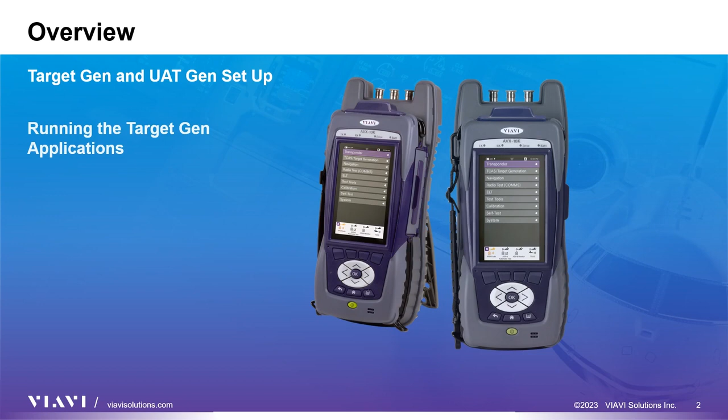In this video, we will be discussing the settings and procedures for both target gen, which is generating targets at 1090 MHz, and UAT gen, which is generating targets at 978 MHz. We will look at saving custom scenarios, saving test generator parameters, and viewing the results.

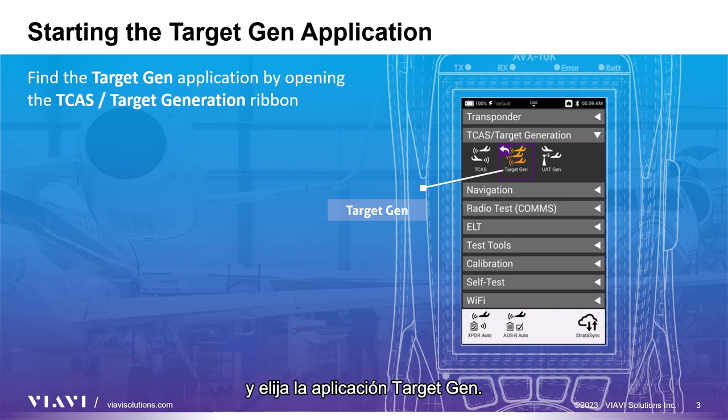Let's look first at the target gen application. After turning on your test set, open the TCAS target generation ribbon and select the target gen application. Icons can be moved around within each ribbon. You can learn more about that and other interface information in our user interface video.

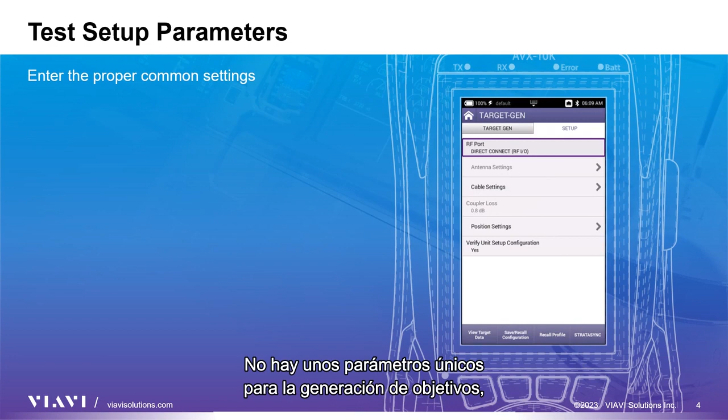There are no unique test setup parameters for target generation, however, there are several modifiable parameters on the main page of the application. As a reminder, the common test setup parameters, like test method, gain and loss settings and position settings, have all been covered in our video titled Common Test Settings and General Preferences.

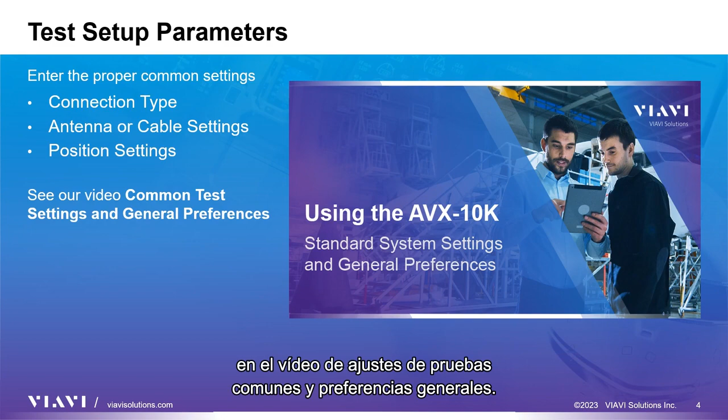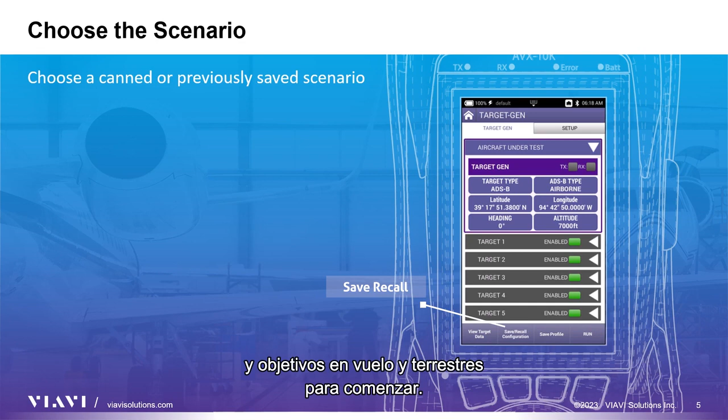The first step is to generate a scenario, and like the TCAS application, some canned scenarios, airborne target and surface target, are provided to get you started. 7 custom scenarios can also be saved. Press the Save Recall Configuration button to view the provided scenarios.

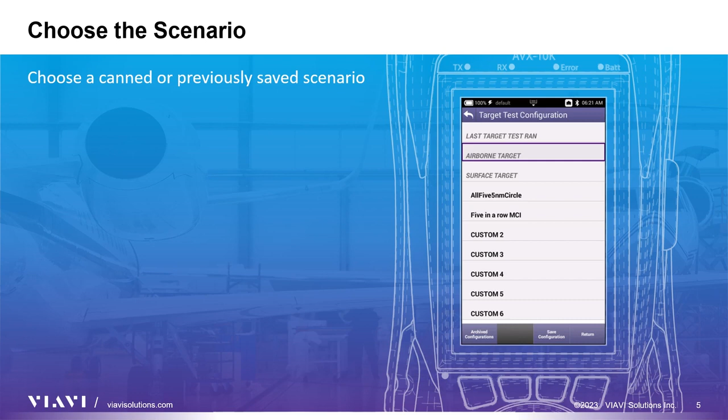The suggested approach is to start with the airborne target configuration, make modifications to fit your needs, and then save the configuration. Before running a test scenario, the aircraft under test needs to be set to an airborne condition and altitude needs to be simulated using an air data test set.

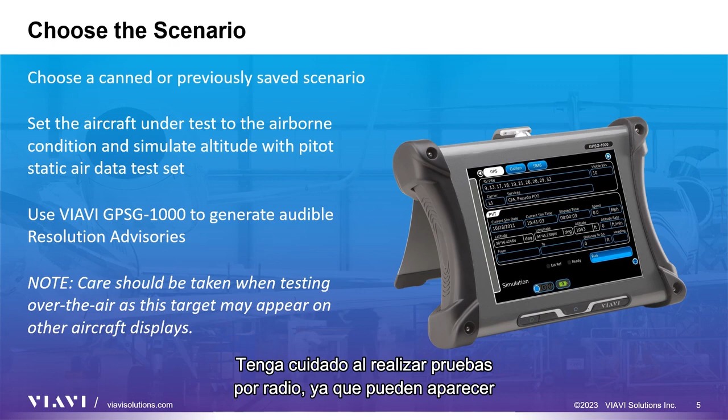In order to generate audible resolution advisories, you will need to leverage the VIAVI GPSG-1000, or similar, and simulate a flight path through the generated targets. Note, care should be taken when testing over the air, as targets may appear on other aircraft displays.

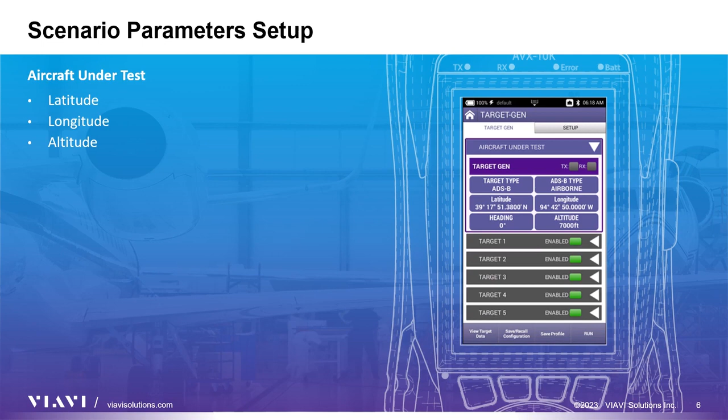Once a scenario has been loaded, any of the values displayed with a blue background can be changed as desired. Enter the latitude, longitude, and altitude of the aircraft under test. This is the reference point that the 5 targets will be using.

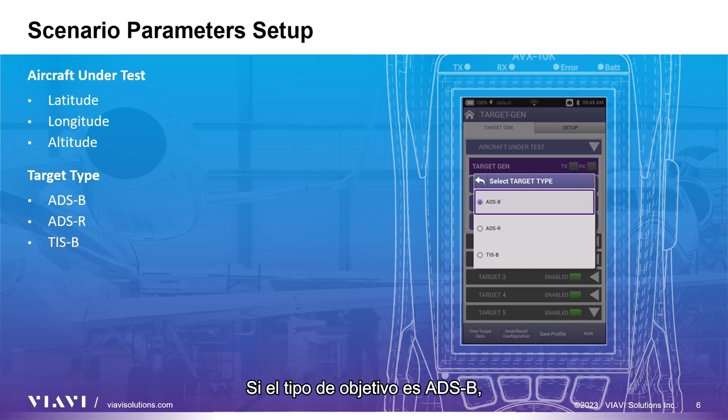Target type can be set to ADS-B, ADS-R and TIS-B. If target type is ADS-B, the ADS-B type can be toggled between airborne and surface.

Now you can set each of the target's bearing, range, and altitude values to place and point targets towards the flight path of aircraft under test. All values are referenced from the aircraft under test location and height.

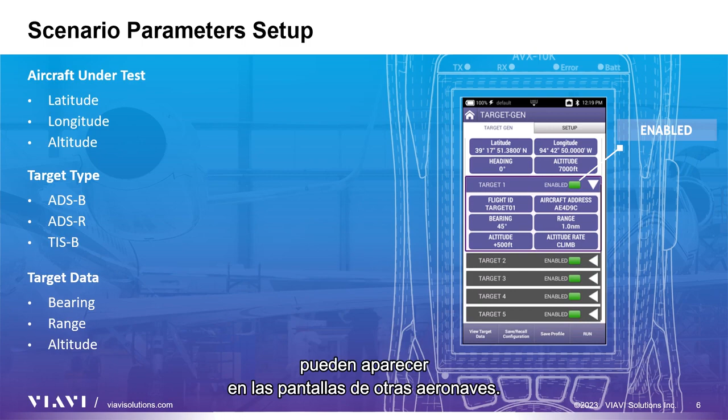Targets can be enabled and disabled by clicking on the green or red indicator. Again, please note, care should be taken when testing over the air, as these targets may appear on other aircraft displays. If you have modified a canned scenario and wish to save it, click on the Save Configuration button.

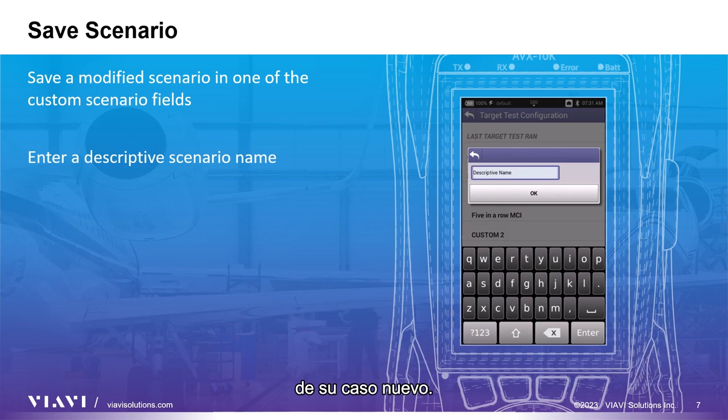Scroll down to one of the custom fields and click on one to enter the name for your new scenario. Once that is entered, click the Save Configuration soft key. The saved scenario will be retained, and you can load it anytime in the future.

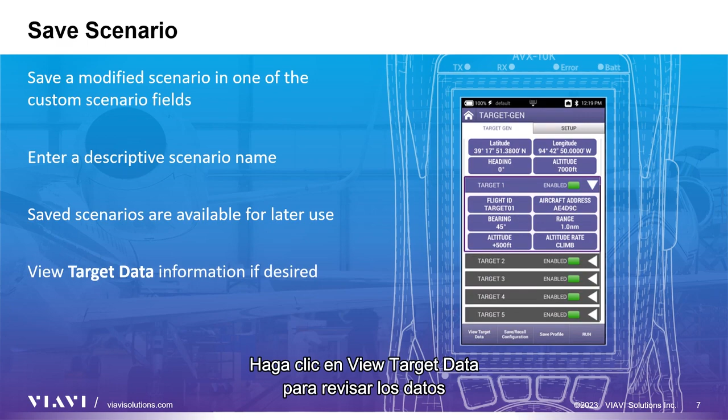Click the View Target Data button to review your target configuration information. Once everything is set up, press the Run key to start the scenario. If the aircraft is configured properly, all targets should be displayed on the aircraft under test.

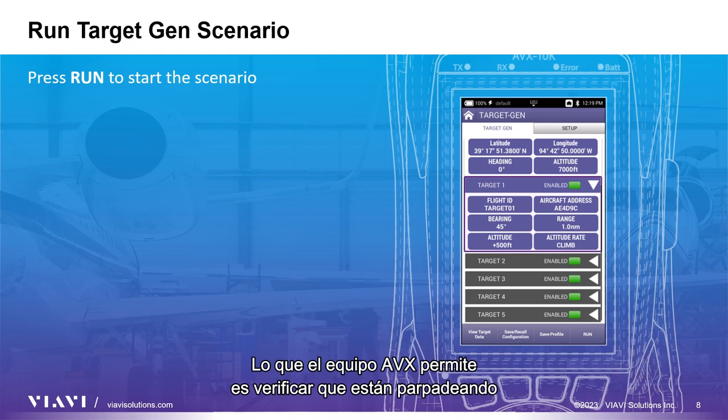There is not much to see on the AVX itself, other than to verify that the transmit and received lights are flashing. Once satisfied that the aircraft unit under test is operational, press Stop to complete the test.

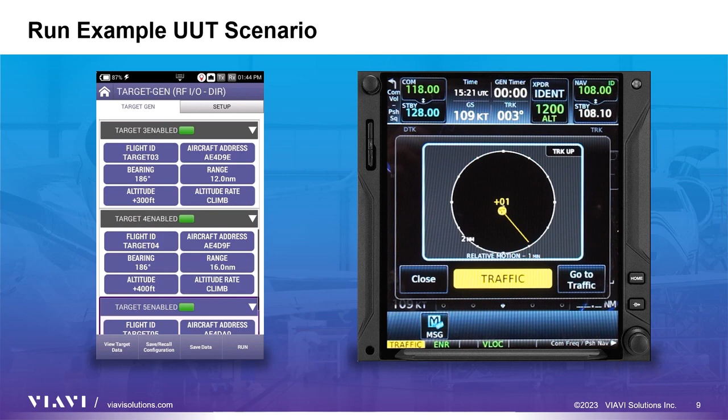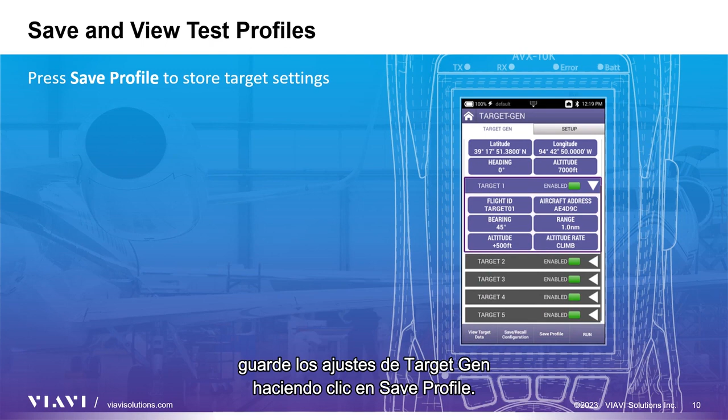If desired, you can save the target gen settings by clicking the Save Profile button. Files can be synced to StrataSync and can be viewed locally by swiping down on the system tray at the top and clicking on View Reports.

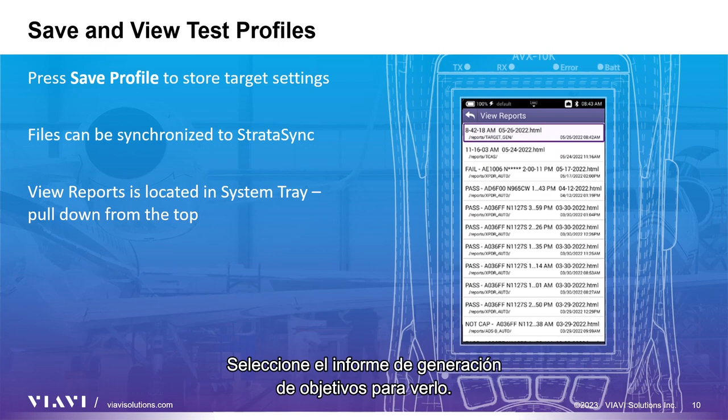Select the target gen report to view. The information saved here is the data used to generate the scenario.

Now let's look at the UAT gen application. With the AVX-10K power on, click on the UAT gen application in the TCAS target generation ribbon. This application is similar to the target gen application, and all setup parameters have been covered in the Common Test Settings and General Preferences video.

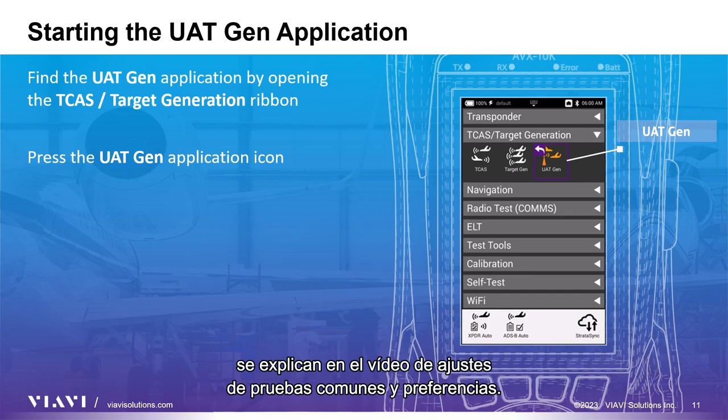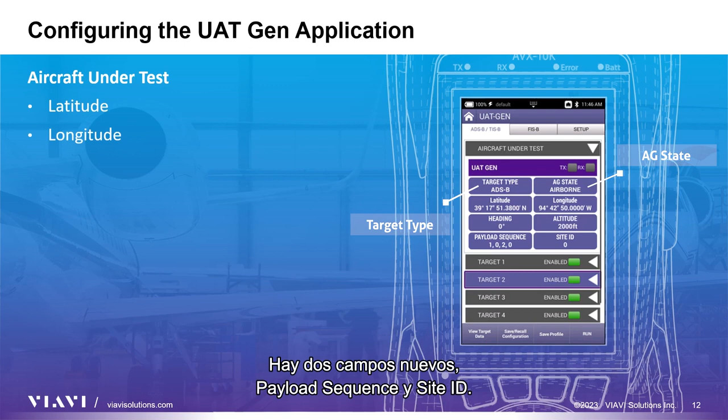For configuring the scenario, target type can be toggled between ADS-B and TIS-B, and air-ground state can be toggled between air and ground. Two new fields in this application include payload sequence and site ID. The default settings should work fine, but these can be modified to suit your needs as well.

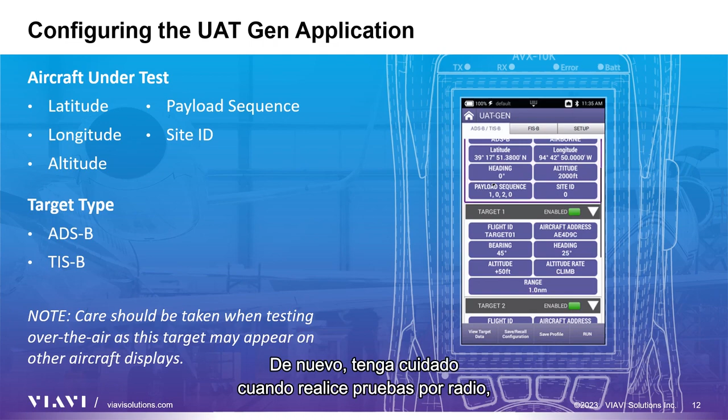Complete each target's bearing, heading, and altitude as required. Once again, please note that care should be taken when testing over the air, as these targets may appear on other aircraft displays. Once everything is set up, press the Run key to start the scenario.

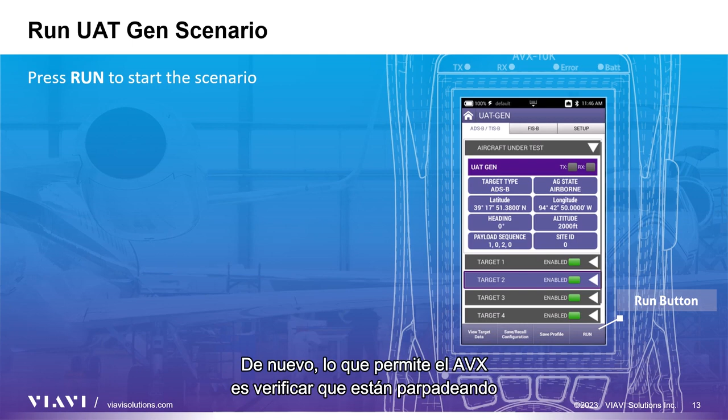If the aircraft is configured properly, all targets should be displayed on the aircraft under test. Again, there is not much to see on the AVX itself, other than to verify that the transmit and received lights are flashing. Once satisfied that the aircraft unit under test is operational, press Stop to complete the test.

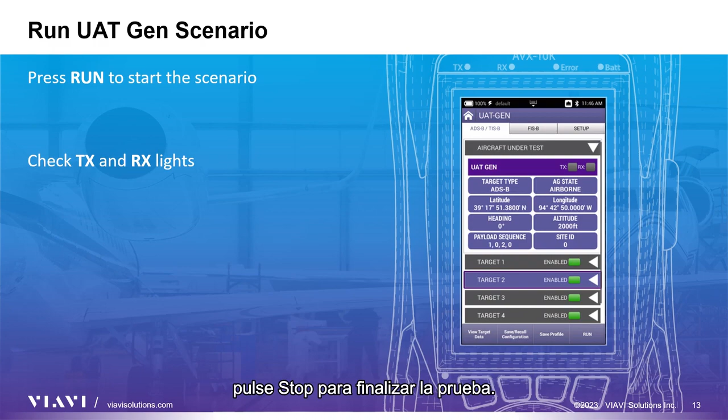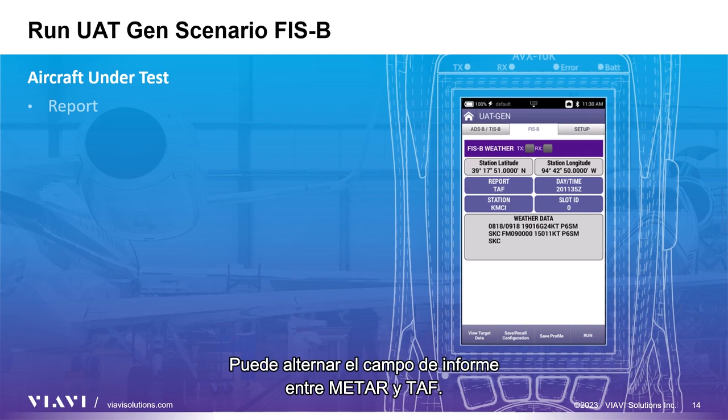For UAT equipment, the FIS-B data can also be tested. Click on the FIS-B tab and set your transmitted FIS-B information according to your needs. The report field can be toggled between METAR and TAF.

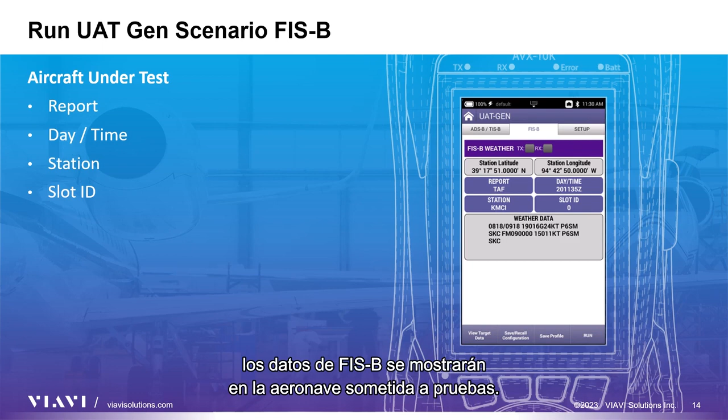Set your day, time, station, and slot ID as needed. Once everything is set up, press the Run key to start the scenario. If the aircraft is configured properly, the FIS-B data should be displayed on the aircraft under test. Once satisfied that the aircraft unit under test is operational, press Stop to complete the test.

Saving data and viewing reports works the same way as the Target Gen application.